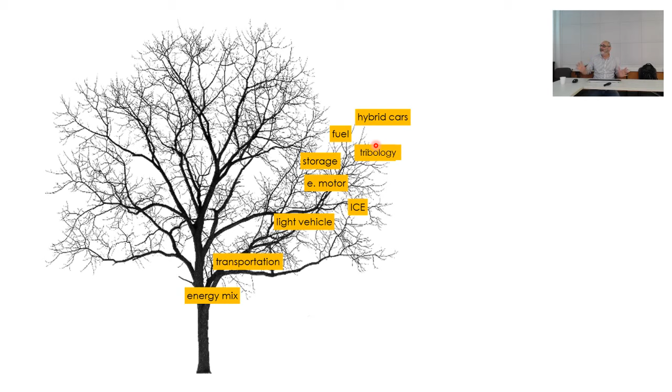I see this subject as a tree of knowledge. So every time you see a tree like this during the presentation, it means that I'm taking one or a few steps back and trying to talk about another subject. So I start my talk by explaining why it seems a mess. I'm going to talk a little bit about all these subjects during the presentation, and I'm giving up doing this in a linear way. So that's the point.

And we can start almost here at the tree trunk by talking about the energy mix. This is the United States energy mix, and I chose that one in particular because it's quite representative of the world's energy mix. Here in Brazil, our mix is quite different actually, so that's why I'm using this one as a representation of the world's mix. This is a Sankey diagram. In this corner you can see the sources: solar, hydro, natural gas, coal, and so on. On the right end, you see the final applications.

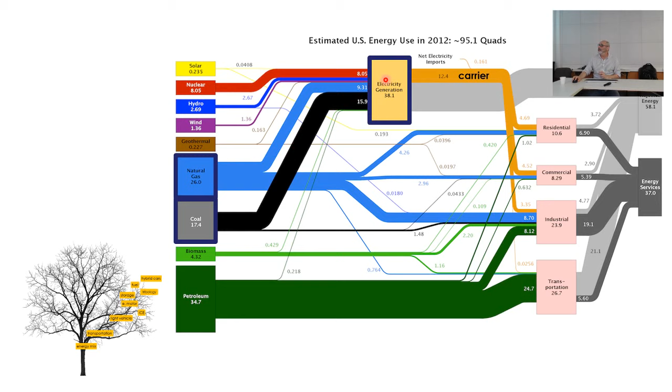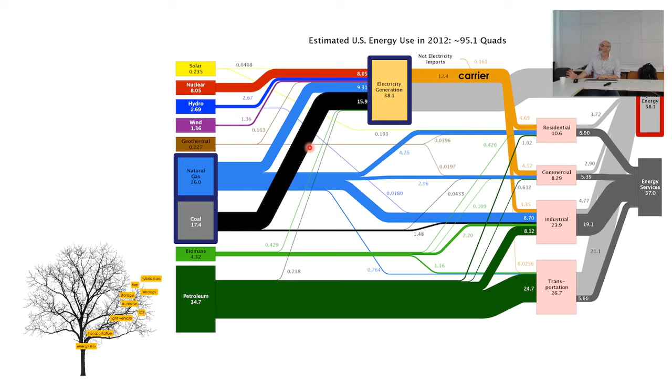And in the middle, you can see what we can call energy carriers. For instance, electricity is an energy carrier, and you see the main sources that contribute to the generation of electricity: mostly natural gas and coal. So if you're talking about electricity, you must understand the geopolitics of coal and natural gas and all the environmental problems. On the other end, you see where electricity is being applied. This is the rejected energy, the amount that is not used. I'm going to talk about that in a few moments.

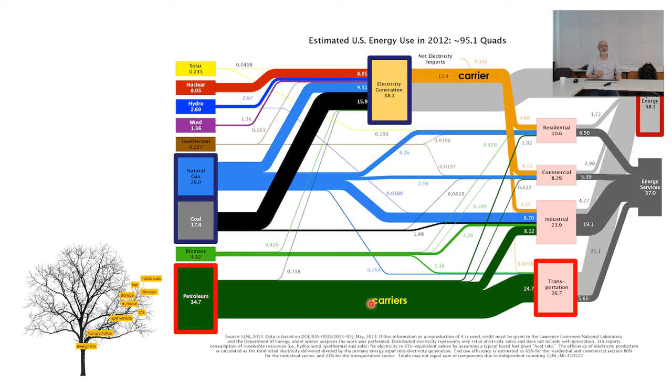But in the transportation sector, the main contributing source of energy is petroleum. In between the primary source and the application, you have carriers: gasoline, ethanol, and so on. If you try to identify the contribution of electricity in the transportation sector, it's a very, very small amount compared to the carriers produced from petroleum. So electricity is not very important for the transportation sector, and it's mainly not for self-propelled vehicles. This is trains and subways, not self-propelled.

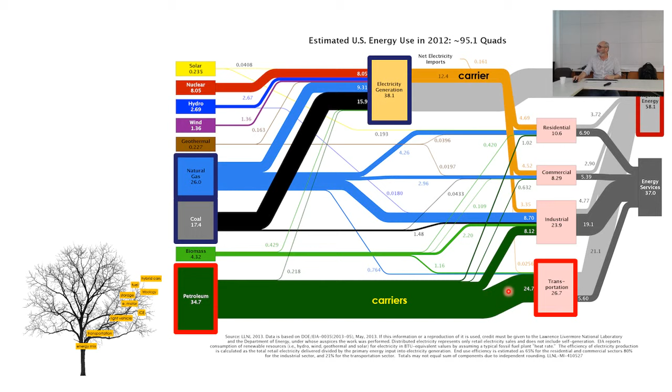So when you talk about transportation, the main source of energy is petroleum. So the geopolitics of petroleum is very important for the sector. If something happens in the Strait of Hormuz, for instance, it's going to affect the whole world. We can open up the carriers: what kinds of carriers and what types of applications you have here.

For instance, you have different types of gaseous fuel, diesel, gasoline, other liquids. Ethanol is in other liquids. And a small amount of electricity. Those are the main carriers. Those are the applications: sea, heavy road transportation, light road, air, and railroads. If we follow one of these carriers, for instance gasoline, you see the amount used in light road transportation is 48 exajoules.

You have to put these numbers in perspective. Remember, the world energy consumption is around 500 exajoules. Exa is 10 to the 18. So when talking about light road transportation, the essential fuel is gasoline and a small amount of diesel, especially in Europe, destined to transport passengers, people. So that's the point.

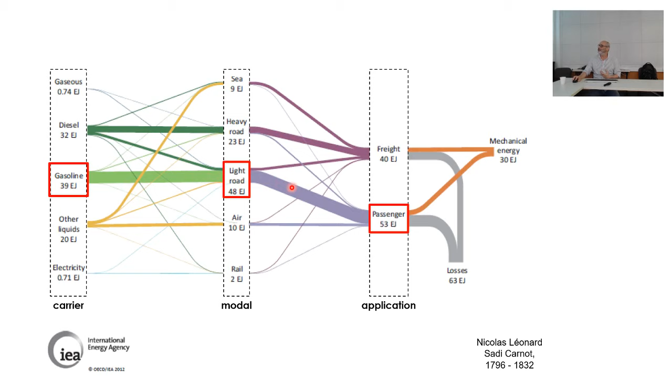And when you think about it, because this is the energy carrier that is being used to transport passengers, you have to extract the amount of energy here and transform that into mechanical energy, especially kinetic energy, because you're transporting these people. So this is exergy, actually. You can see that this mechanical energy corresponds to 30 exajoules out of 93, which is 53 plus 40. The difference is labeled as losses.

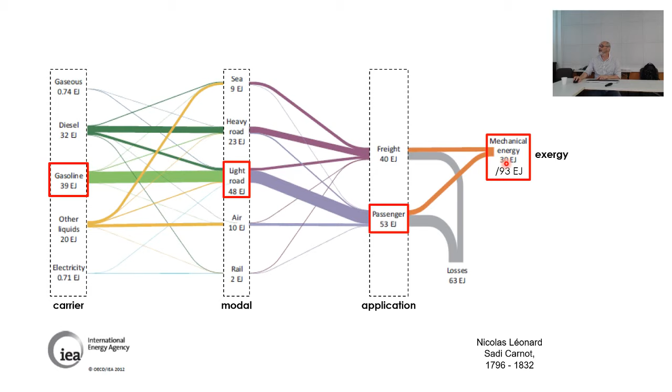I don't agree with this term 100%, but the transformation of all this energy, 93 exajoules into 30 exajoules of exergy or mechanical energy, is done in engines. So you have to understand how engines work. For instance, in gasoline light vehicles for passengers, usually 99% of the engines are spark engines, Otto cycle engines. And you might think those losses are due to poor technology, poor realization of this technology. That's not the case.

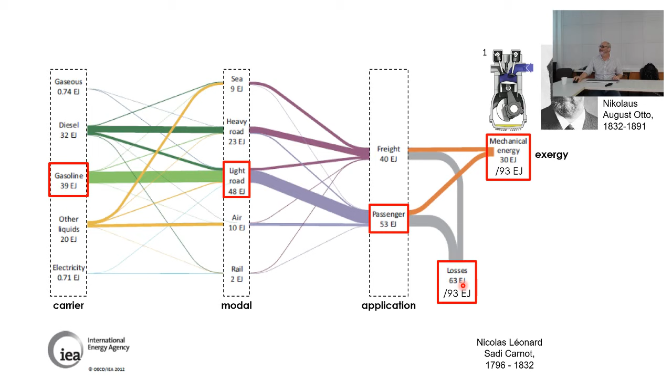I would say 90% of those losses, let's be a little more modest, are actually due to the second law of thermodynamics. They are unavoidable. So you can see how this subject is highly connected, multi-branched. I'm just giving you some examples prior to talking about hybrid cars. So let's move on. Remember, every time you see a tree like this, we were near the trunk here. Now I'm getting a step further.

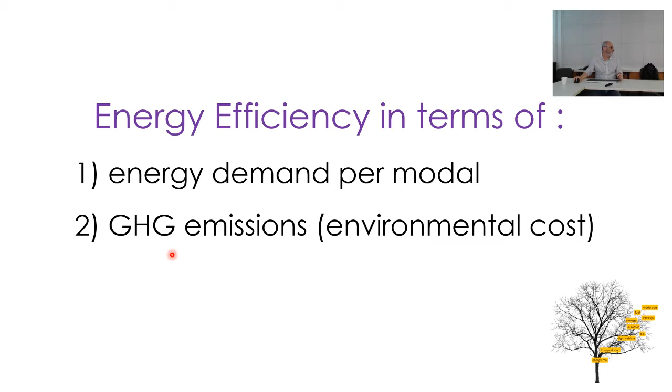Let's talk about energy efficiency in the transportation sector in terms of energy demand per modal. What are the demands for sea transportation? And also in terms of environmental costs, especially greenhouse gases. You see some very interesting numbers here. Focusing on demand per modal, you can understand this in terms of this operation envelope, which is characterized by two variables: the energy cost, how much energy you're spending to transport a certain amount of passengers or freight, and the velocity.

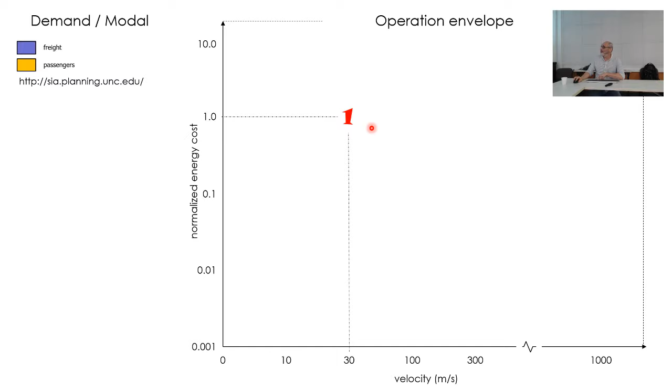And the term normalized, because we're dividing those variables, the energy cost, if I'm not wrong, by the energy demand of an average passenger. So that's the normalization that we are using. In this operation envelope, the ideal world would be to work in this region, because you're accomplishing your transportation task with a very high velocity, so you're going faster, and being in this region of the vertical scale means that you're spending less energy. So this is the ideal region.

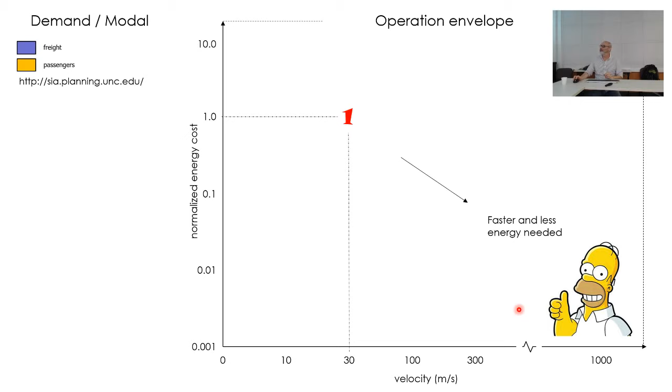When you survey all the transportation technologies and plot the points in this graph, you see, for instance, in terms of passengers, those boxes are actually clouds of points, and each point represents a particular car, a particular bicycle, and airplanes. Sorry for the Portuguese, I didn't have time to translate everything. So when you plot the actual points, you get actual applications in this region concerning passengers.

And when you plot the solutions for freight, those purple clouds of points, you see a tendency to spend less energy. Not a tendency, actually; this is how they become more economically competitive. So for every transportation solution for freight, it's more important to spend less energy than going faster. And remember, we said it would be nice to be able to be here. So why are we not achieving this?

You see there's a void here, except for Homer Simpson over there. So why is that? You see that there's a kind of frontier over there, a Pareto frontier actually, and this reflects the first and second law of thermodynamics, because you cannot go at a very high velocity while spending very small amounts of energy. It's not feasible, because you have to compensate for drag, aerodynamic drag, for instance. So you're going to spend energy for that.

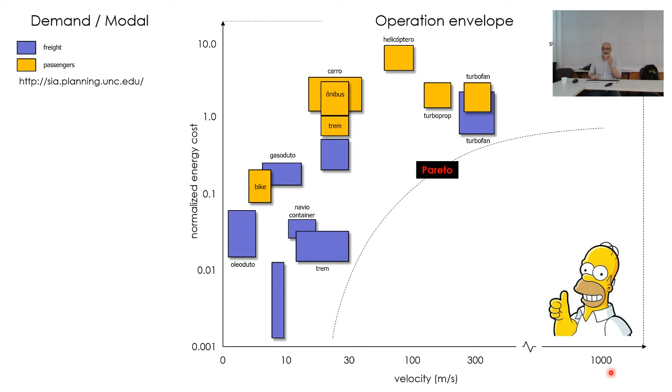And you see that the most important technological solutions near that frontier are very big planes, very big ships, and very big trucks, actually road trains. And this is understandable. Let's talk about a ship. The amount of revenues that you get from a ship like this depends on the volume of the ship. So the larger the volume, the higher the revenues, and the costs depend on the external area of the ship, because it's related to drag.

So when you increase the scale, the volume increases with the scale factor to the third power, and the area with the scale factor to the second power.

So you see that by increasing the scale of your transportation vehicle, you have increasingly more volume compared with the area. So that's why for freight, especially for freight, the solutions are tending to become larger and larger and larger. And this is going to affect roads and several other aspects. So this is regarding the energy demand.

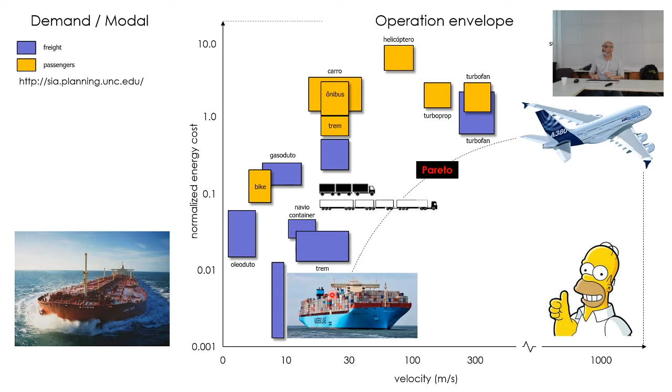Okay, when you talk about emissions, this graph here is very interesting, because you see the most highly emitting transportation modal is airplane. Okay, and its consumption is not that great. Where is aircraft? Okay, so you see it's only 8% in terms of energy demand, but its emissions per passenger per kilometer is several times higher than the second worst one, which are cars. Okay, and hybrid cars are here.

Well, for individual transportation, you see that except for walking and bike, hybrid car is a very, very good solution here. You can see that already, okay? The other ones are collective transportation solutions, okay? And this is related to the speed at which this transportation is accomplished, because the aeronautical engines are actually optimized to be light and not to be highly efficient.

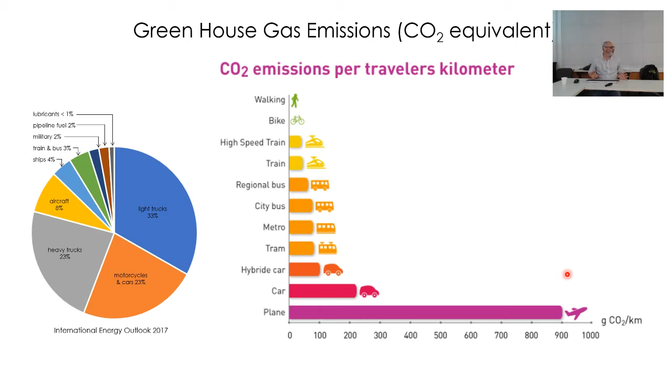So that is why developing fuel or a biofuel for airplanes is a very important technological challenge, because although the consumption is only 8%, the emissions are one order of magnitude higher. So you see, I'm talking about many things at the same time, so I hope you don't get lost. That's why we always see the tree. So every time I'm moving from branch to branch in this tree, you're going to see this image.

Okay, so let's move on and let's talk about the energy conversion chain in the transportation sector. Okay, because I talked about the primary sources. You see that it's mainly petroleum, 99% is petroleum. Ethanol is labeled as other liquids, and this is quite disturbing actually for us that we are trying to develop that. And well, this is not true in Brazil. Ethanol is a very important fuel here in Brazil, but not in the world. In the world, this is incipient, I would say.

Well, so let's try to make this analysis, what I call the energy conversion chain, also labeled the well-to-wheel analysis. Okay, so that's why you see the tree here. So let's start at the well. You have a primary source, which we know is petroleum. You have to transform it, because petroleum is the primary source. You cannot use petroleum as petroleum in an engine, for instance. So you have to transform that into some kind of energy carrier: gasoline, ethanol, or kerosene, for instance.

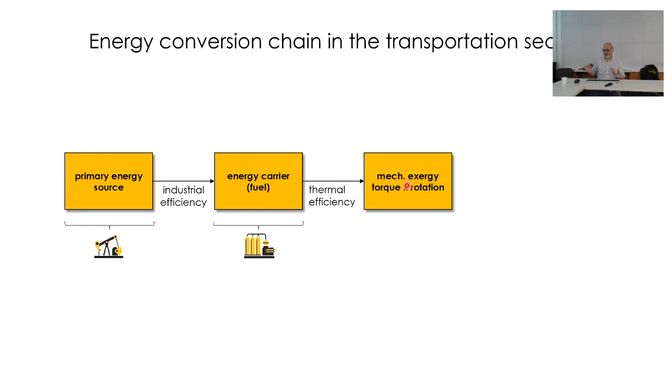And since we are talking about fuels, electricity is not the case. I'm going to talk about electricity in a moment. But you have to have thermal efficiency, and you have the second law of thermodynamics intervening in this segment. So you can have mechanical power at the level of the wheel or the propeller, for instance, of your ship, and you also have to have propulsive efficiency, because this has to be transformed into kinetic energy, which is pure exergy.

So this is force times speed. In this airplane engine, for instance, you accelerate the gases in this direction, and the reaction to this becomes a force. But this force is not yet speed. There are conditions under which this conversion, or generation of speed from this force, can be achieved with a high efficiency.

For instance, I don't know if you know, but in order to have maximum propulsive efficiency, the speed of those exhaust gases here must be exactly the same as the speed of the aircraft. So that's the most efficient situation. So that's the conversion chain: primary source, fuel, mechanical exergy, and kinetic energy.

We can also segment this into self-propelled vehicles, which means that they carry their own energy source, which is different from a sailboat, for instance. Its energy source is wind, and it captures the wind that is in nature, so it doesn't have to transport its own energy source. So we have to talk about energy storage technologies, and also about what we could call powertrains, the means to convert this force into speed.

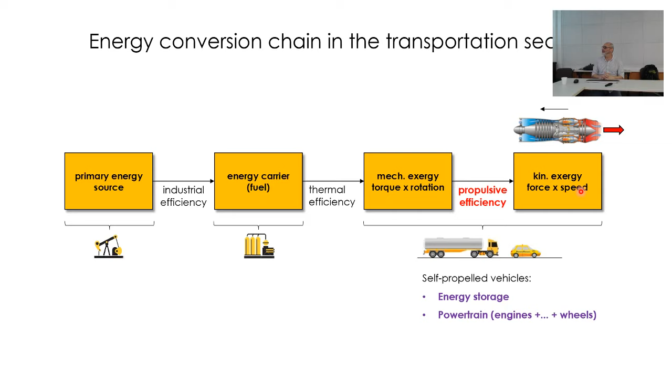Tires, for instance, are a very important subject in this matter, and it goes under the label tribology in that knowledge tree that I showed at the beginning of my talk. So we're going to talk about self-propelled vehicles in general, and let's start by talking about energy storage solutions for these kinds of applications. Remember, I'm not talking about non-self-propelled vehicles like a sailboat or a train like this.

I consider this a very interesting subject, but you can start by asking yourself, how do batteries compare with liquid fuels in terms of energy storage? Remember, a battery stores electricity. A liquid fuel you have to burn, you're going to produce heat, and this heat you have to convert into mechanical energy. So the second law of thermodynamics applies in this conversion. So in order to compare fuel with batteries, you have to compare in terms of exergy, not in terms of energy. So this is fair when comparing both.

If you compare the internal energy of a certain fuel, it's going to be 4 times higher, because the electricity that is stored in the battery was, for instance, produced by burning coal, and when you burn coal, you were subjected to the second law of thermodynamics. So comparing batteries with fuel in terms of what? In terms of two things.

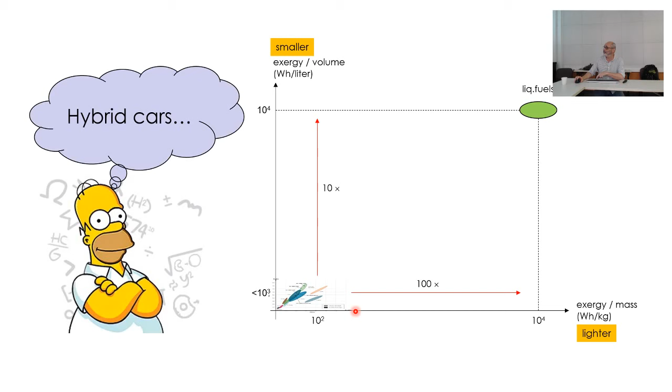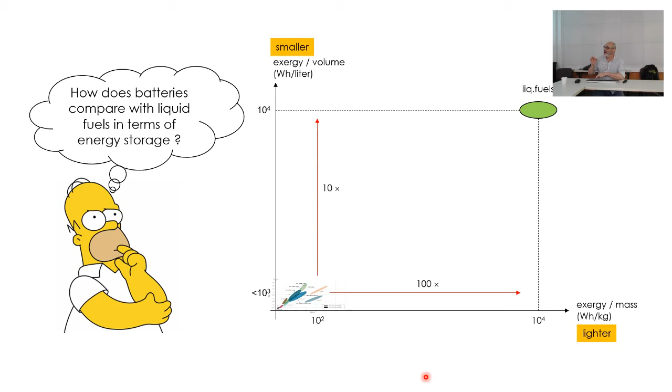Okay? So, yeah, just a few numbers, very interesting, because those are qualitative numbers, except for the previous slides in which I showed you the actual numbers of batteries. Remember the numbers, 120, 200 watt-hours per kilogram. Remember these scales. Now I'm going to show you actual fuels. You have megajoules here. The conversion factor is 3.6. Okay, so several orders of magnitude better.

And you see, for instance, those rockets. This type of rocket uses two types of fuel: liquid hydrogen for the main tank here, and solid fuel in these boosters on the side, which are in here, aluminum, things like this. You see kerosene, gasoline, diesel, and we ourselves, we're not that bad. You see the fat metabolism. So fat is a very good solution for energy storage, because we are a self-propelled transportation device. We transport ourselves, and we have to have this energy storage solution.

So fat is very interesting, but this is another point. Fat is a good storage system because it stores a huge amount of energy in a few kilograms, and it occupies a small volume, but the rate of release of this energy is low. I mean the power, because this is energy, not power. So that means that we are very efficient in terms of energy, but we are not very powerful. Birds have to be powerful, especially hummingbirds, they have to release energy at a very high rate. So their metabolism evolved to take that into account.

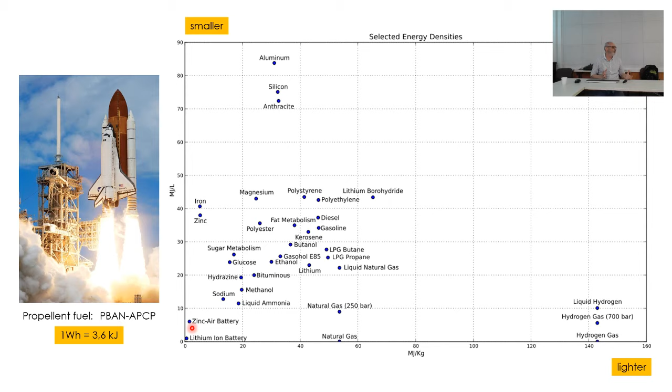Okay, so this is a very interesting graph, and you see batteries, zinc batteries, lithium batteries are near the origin. So that's why I say that pure electric cars are actually a niche solution. It's a very interesting solution for very specific problems, not for the general transportation problem which we have in our world today. Okay, so let's move on.

You see the tree. I'm going to just change subject. I hope at the end of my talk you will be able to form a broad picture of the subject, but you have to assemble these ideas and discussions by yourselves. I hope to make this easy for you. Well, so let's talk about these traction systems, because they are the last link in the conversion chain which I showed you a few slides ago. We have to understand how the mechanical energy at the level of the shaft is transformed into kinetic energy for your transportation application.

And we're going to focus obviously on hybrid vehicles. So let's see a type of hybrid vehicle. I like this one. It's a BMW concept car, and by concept, it means that it was not developed to earn money, but to test ideas. So it has a lot of interesting ideas. Let me zoom, because I think it's going to be easier. You recognize a hybrid car because, first of all, it has two types of engines: an internal combustion engine here and an electric motor. These numbers are particular to this model, but they are representative.

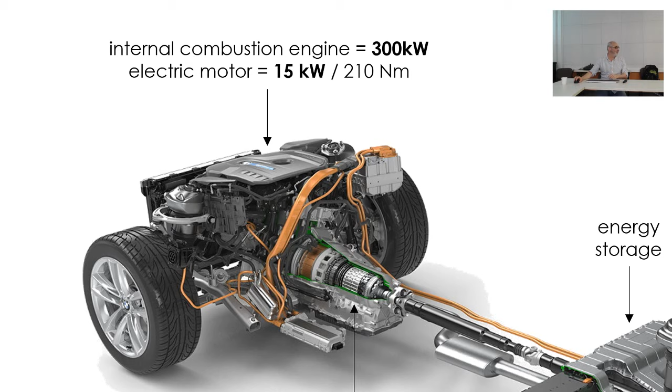Keep in mind the nominal power of the combustion engine is 300 kilowatts, and the power of the electric motor only 15 kilowatts. Keep these numbers in mind because I'm going to explain. So first, you have two types of motors. Second, you have a mechanical device which can be called a power split. In addition to a gearbox, you have a power split, which are planetary gears, I'm going to show a picture. So I'm going to explain what this kind of mechanical device does.

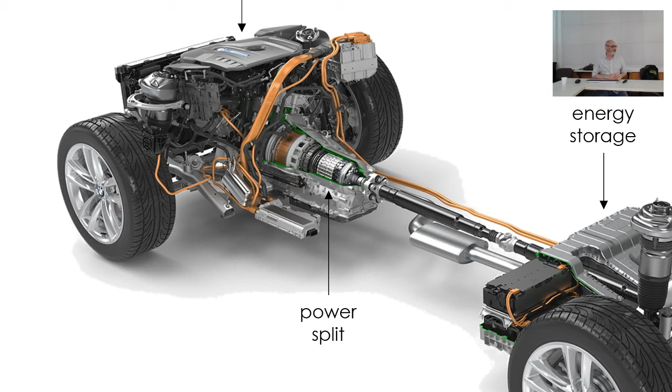I imagine that you guys are from very different areas, not only mechanical engineers. So please stop me if I'm using undecipherable language in terms of mechanics. But you can see the power split. Another interesting thing that tells that a car is hybrid: you have two types of energy storage. So you have a liquid fuel tank.

It could be gas, but it's not efficient. Okay. So you have a liquid fuel and usually a small battery. This battery is more like a buffer battery. Well, I'm going to show you the topologies in a few moments, so you're going to understand.

They use lithium, sodium, sulfur. It can be the best that they can do, actually, because the point is it's small compared with the pure electric car, because in the pure electric car 100% of the energy must be stored in the battery. So roughly 1/3 or even 50% of the weight of the car is batteries. Okay, so this is very bad for efficiency.

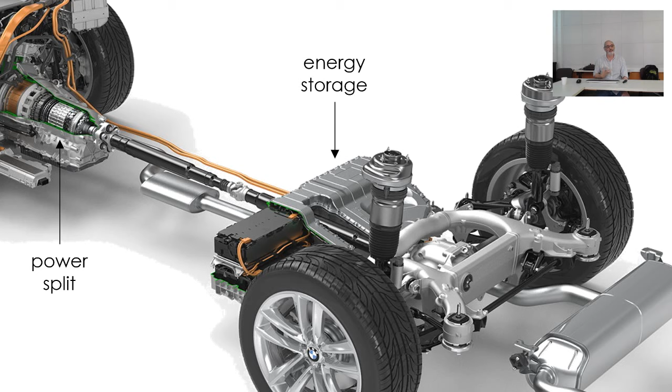Think about the envelope that I showed you a few slides ago. Okay, but hybrid cars have just a small battery, and I'm going to explain why it doesn't need to be a big, large, heavy battery. Okay, so this is a typical hybrid car, and you also have, well, traction wheels.

This is very important. Let me just point out that electric motors are so good in terms of traction system because they can be miniaturized and they can be put inside the wheel. You can have 4 different independent motors, which can be controlled by a computer, and you can put that into each wheel. So it's a very, very good solution in terms of a traction system. No, not an attraction.

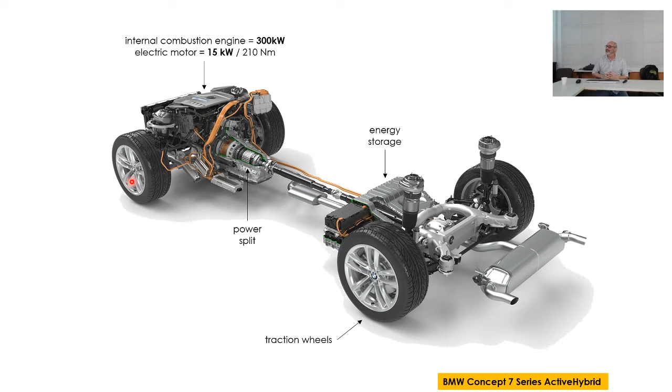A traction system, okay? But the problem is it uses pure exergy, which actually is electricity. So the problem is how to produce this electricity. So let's move on. And again, we must choose a direction in this knowledge tree here. Let's talk about these different drive configurations. Because hybrid cars are a kind of mixture of a pure internal combustion engine car and a pure electric car, but this melange can be made in very different ways. Okay, so let's talk about these configurations.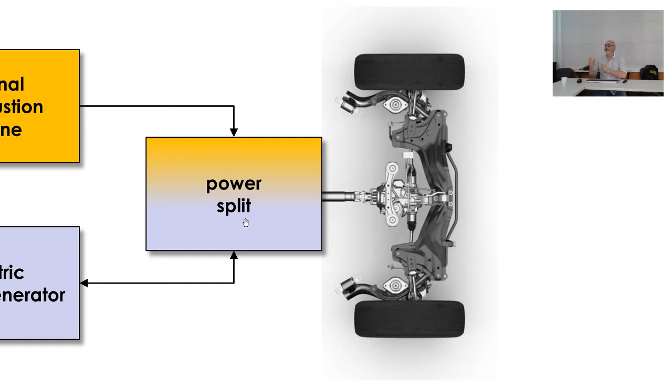So those devices are gears actually, and they are very interesting because, for instance, if the wheels are demanding power, this power split can take 70% from the internal combustion engine and 30% from the electric motor. Another thing it can do is when braking, the power split can cancel this connection here, and send mechanical power to the electric generator.

Okay, so it can store the braking energy. And this is very important in urban applications, for instance, because it can amount to 10 or 15%, depending on the traffic conditions. So 15% is a very good saving.

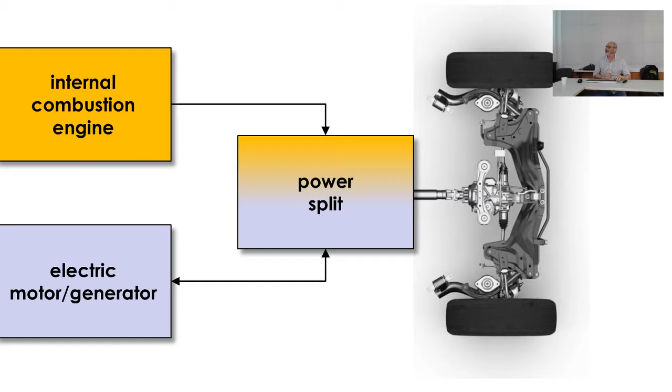Okay, so the parallel configuration. It has two motors. Remember, the BMW motor that I showed is a parallel configuration. You recognize it because you see the power split. So it has an internal combustion engine. Remember the numbers: the power for the BMW motor was 300 kilowatts, and the electric motor was only 15 kilowatts. It's one order of magnitude smaller, 20 times smaller.

The electric motor/generator is connected to a small battery. It's still a small battery because the main source is still going to be fuel. The advantage is that you can charge the battery externally, as you need to do with the fuel reservoir. And another thing to point out is that this configuration is also capable of storing the braking energy.

So when braking, the power split sends the mechanical energy. The motor becomes a generator. It's just a matter of switching the connections inside. And it's going to generate electricity, and this electricity is going to be stored in the battery.

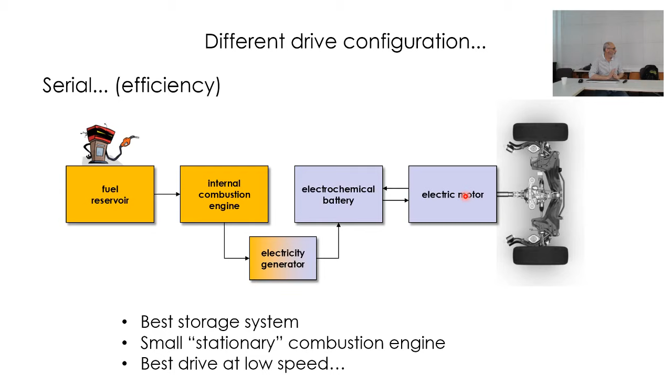So in the serial parallel configuration, when you put the numbers 300 kilowatts, 15 kilowatts, is this level of power, 300 kilowatts, the maximum power? For that particular car. But as in the regime of maximum power delivered by the engine, not at all moments. In the city, I think it would be 10 times less.

Yeah, sure. But what I want to try to explain is why the electric motor, this motor here, is in no case going to be 10 or 20 times less powerful than the other one. The maximum. The limits. And I'm going to show that, and actually we're going to make calculations and simulations; in my last slides I'm going to be dealing with this subject. Okay. Thank you.

So let me conclude this slide by pointing out that this configuration combines the best qualities of both drive systems. And I'm already anticipating some things that I'm going to show you in detail. The electric motor, in addition to being efficient, is a very good traction system at low speeds, especially when you're starting to move. I'm going to show you that.

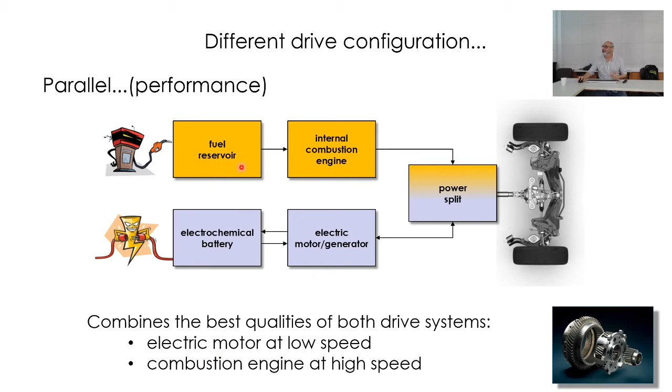I'm going to show you that electric cars are very good for cities, for urban applications, okay? But on roads it's also good, but the internal combustion engine is actually better, especially if you have to have liquid fuel anyway. So let's move on. Let's try to be a little more specific.

And when I say that the electric motor is very good for low speed applications, let me show you why, try to explain. And to understand this, you have to look at the torque curves.

Sorry for the Portuguese. I keep finding things in Portuguese, so sorry for that. You please ask me if you don't understand one of those terms in Portuguese.

So that's the torque curve of the electric motor, and that's the typical torque curve of an internal combustion engine. The first thing that you see is that in electric motors you have actually almost the maximum torque at zero rotation. Okay, why is that? Because in order to have a torque or a force, actually, you only need to have electricity flowing in the coils of the motor.

Okay, the car can be stopped, and if you have electricity, you're going to have a force. This is very, very good, because when you're starting the movement, you need exactly this. You need a very high torque in order to start the movement, in order to start it efficiently or quickly, if you're looking for performance. Another characteristic is that its torque curve tends to decrease with the increase of the rotation of the shaft. This is another typical characteristic of an electric motor.

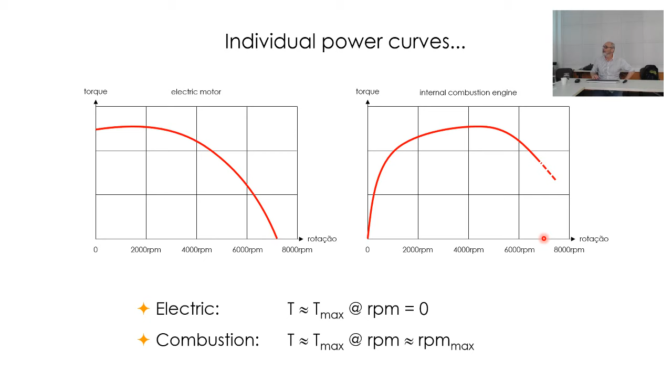This curve here with this flat top is typical of cars, because they have to work under different rotations, 2,000 RPM to 7,000 RPM. This is a typical application. So let's move on.

So if you are at low speed, 2,000 RPM, for instance, it's going to use 100% of the electric motor, which is written in red here. And above, let's say, 5,000 RPM, 100% of the power is going to come from the internal combustion engine. In between 2,000 and 5,000, you have a linear combination of both. And this is done by the power split, which is actually a planetary gear system.

So the combined torque curve is the dream torque curve, actually, because you have maximum torque at zero rotation. This is very good for starting the movement, and you have a flat top until, well, actually, at these rotations, 100% of the power is coming from the internal combustion engine.

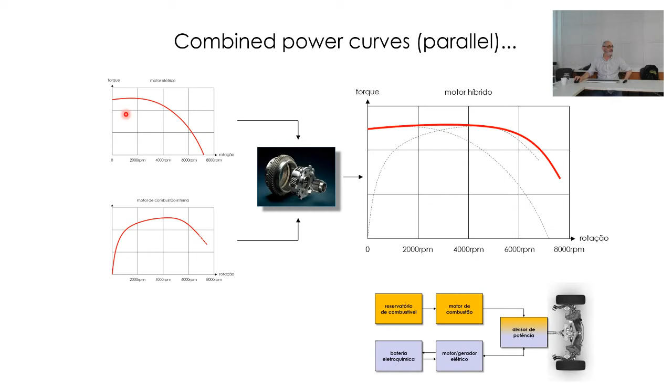You see, you have this flat top here from the internal combustion engine. This is very good. It means you have a high torque at high rotation speeds. This is fantastic for traveling on a road, for instance. And you also have high torques at low rotation speeds, actually at zero rotation speed. So this is a dream torque curve.

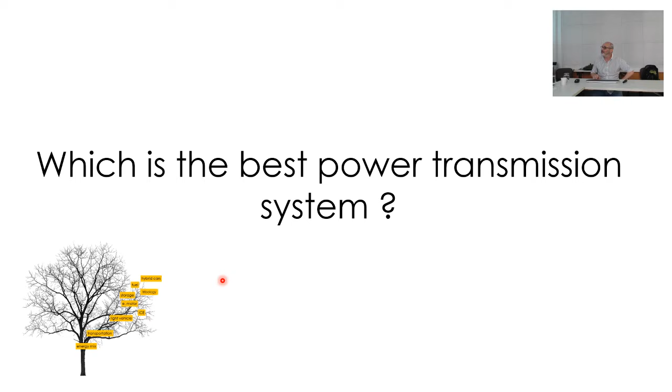And since we're talking about several different configurations, which is the best power transmission system? In order to answer this question, we have to take a few steps back here in this knowledge tree and do some comparisons. When we talk about best, it depends in terms of what. So let's talk first about energy/emissions efficiency, and let's compare that with the pure electric car.

So this is a typical electric car. It's very simple, even simpler than I'm showing you, because it doesn't need to have a gearbox, for instance. I'm going to show you that in a few moments. It's going to be a good technological solution if the electricity that you have to supply externally is produced from renewable sources, or at least from sources that are not emitting greenhouse gases, for instance hydropower, which is what we have here in Brazil.

But let me point out that even if you're burning coal to produce electricity, this is a good solution for urban applications, especially in very large cities like Paris, San Francisco or Santiago, cities in which you have pollution problems. They are usually near mountains that hinder the dispersion of these pollutants. So even if you're burning coal, at least the CO2 that is being emitted is far away from downtown.

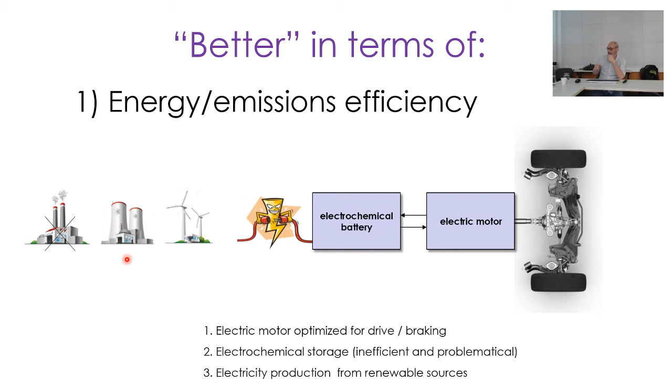I'm pointing this out because, I don't know if you remember my first slide, I showed you the mix, and electricity from nuclear power plants is very important in the world. Not in Brazil, but in the world, yes. So this is a good solution for urban areas, especially very big cities which have dispersion problems. But batteries are still a problem.

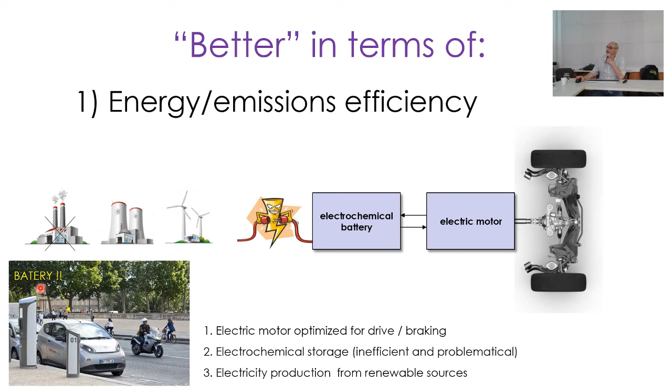If you compare that with the serial configuration, the serial configuration is actually an electric car with its own power plant. You transport your own power plant, and this means that you're combining the best energy storage solution, liquid fuels. You have the stationary combustion engine and the generator here. So the series combines all good solutions, and you have the same problem.

If you use biofuel or some fuel from a renewable source, not from petroleum, this is a very good solution also in terms of emissions. It's a good solution in terms of performance at low speeds, I already talked about this, and in terms of emissions, it will depend on the primary source of your fuel.

In this case, you can optimize the combustion engine to work at a better torque point, and only produce the energy. You don't have to follow that curve.

This is typical. Even small generators that we can buy at the supermarket have these characteristics. They work near a very specific rotation, and they are optimized to be highly efficient at that rotation. If for some reason you have to work far away from that rotation point, it's going to be very inefficient. But that's a good thing to have.

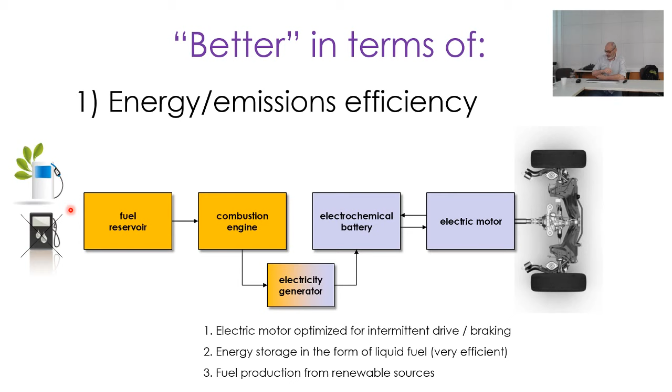And the other one, the parallel configuration, well, it's the same actually. In addition, because of the power split, it's a relatively small component. So it transforms the parallel configuration, because if you look here, it's almost like a pure electric car with its own power source.

So the parallel configuration can, in some situations, work as a serial configuration. In this situation here, for instance, you have power coming from the internal combustion engine and being sent to charge the battery and to the wheels. In this situation, it's working almost like a serial configuration in terms of performance.

Okay. In terms of emission, well, the same applies. It will depend on the source, the primary source. So if you have some renewable fuel here, or a fuel produced from some renewable source, that's okay. And the same applies to electricity.

Okay. And I'm going to show you a simulation actually, the possibility of optimizing not the configuration, but the control here, to adapt it to different situations. Okay. Oh, in this case, it's a hybrid system with a parallel configuration. Yeah. And that is plug-in in this case. Yeah, because you can charge the battery. It can be plug-in or not.

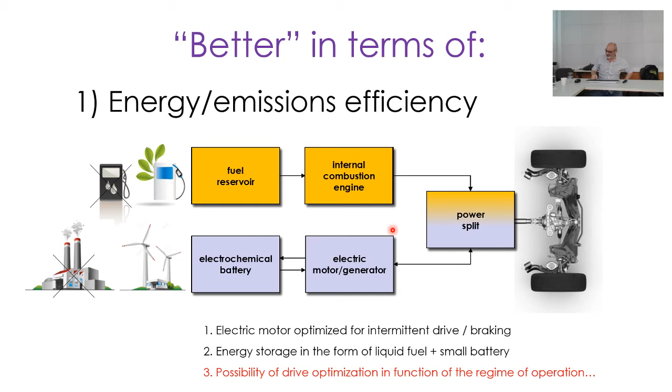Yeah. Again, let's take another direction in this knowledge tree. I was talking about efficiencies in terms of energy and emissions. Let's talk about performance. Okay, because when we want to go from point A to B, we have conditions to be satisfied. Okay, we don't want to go from point A to B in a year. Okay, we have expectations. So performance is a very important issue.

And when we talk about performance, well, there are several operating conditions. For instance, highway conditions. It's an application very different from urban conditions. Okay, in a city you stop and you start and you stop and you have traffic jams and so on. This is very different from a highway, for instance, where you're going to spend even hours at the same regime, or not a very different regime.

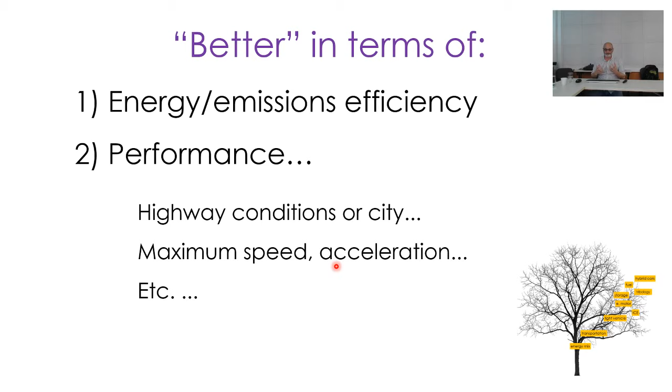And also, depending, you can be talking about competition. So you would like to have a maximum speed or maximum acceleration and so on and so forth. Okay, you need to have how to compare these technologies. So let's try to make a competition, a virtual competition based on actual data.

Okay, so our competition, what's the idea? We're going to have three competitors. One with a hybrid car, another one with a pure electric car. Well, remember, this is electric or a serial configuration, because a serial configuration is an electric car with its own power plant. And we're going to have a traditional combustion engine car. And we're going to look at two things: the acceleration time from 0 to 200 kilometers per hour, and its maximum speed. That's a virtual competition.

We're going to write down the equations and simulate that, and we're going to arrive at some interesting conclusions. You can go to a bookstore and see many types of comparisons like this, but when you do these comparisons, you have to compare equivalent motors. And in which conditions is a hybrid configuration equivalent to an electric configuration and to a typical combustion engine? The key word here is equivalence.

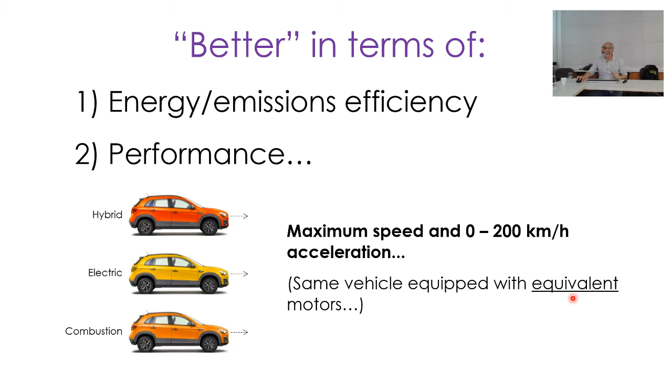Okay, how do you have this? That's what I want to explain, because the equations I'm going to show you are very, very simple. So the most important idea here is how do you have this? Let's start writing down some equations. The relation between the speed and the rotation of the wheel will depend on the radius here and also on the transmission relation and on the rotation of the engine. Sorry if this is too trivial for you, but we have people from several areas, so I took the liberty of reminding you some equations.

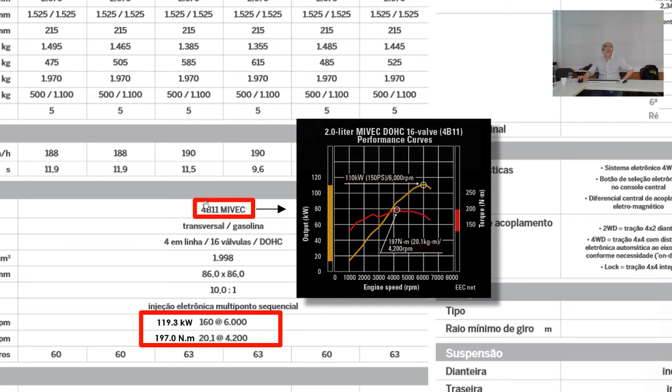Those are very simple equations, but the point here is omega is the rotation of the engine or the motor, and omega wheel is the rotation of the wheel. They don't have to be the same. Okay, and I took an actual engine. At the time I had a Mitsubishi ASX, and that's the data sheet of the car. I don't know if you can see here, but that's the model. I have the torque and power curve here.

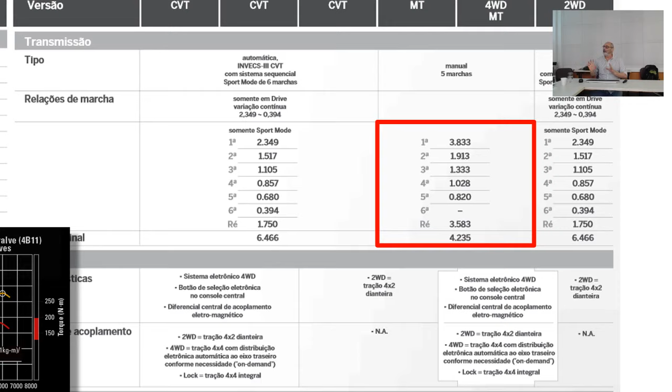Some important parameters here: the maximum power and the speed at which it occurs, the maximum torque also, 197 Newton meter. So I'm going to virtually build three cars equivalent to those characteristics. Other important parameters are the transmission relations for each gear. So they are all going to have the same characteristics. And I wanted to point out that this is an actual car. It's still in the market. Okay, so let's see. That's our internal combustion engine car.

It's already done, because we have that in the market. So let's try to build a virtual electric and a virtual hybrid car from this, being equivalent to this car here. So let's see how it works in terms of why do we have to have gears?

You see, I pointed out already that the rotation of the engine is not necessarily the same as the rotation of the wheel. And why is that so? Because you see, that's the torque curve of the engine, and that's the rotation speed of the shaft. And when you apply the transmission relations, which come from the gearbox, and also there are some differentials that you have a fixed transmission relation here.

But anyway, when you apply this parameter A, you see that if you are in the first gear here, at 7,000 RPM, your speed is going to be only 50 kilometers per hour. So that's why you need gears. If you want to go further than 50 kilometers per hour, you have to engage the second gear, third, fourth, and fifth gear. Sorry if this is too trivial for you, I'm very sorry for that.

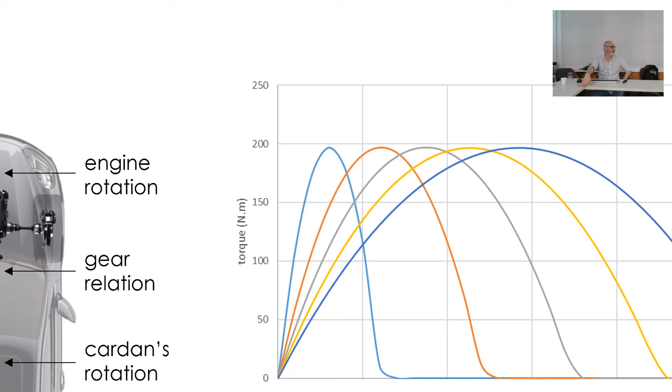So when we have to engage another gear, for instance, at first gear you start movement, then you feel that it's slowing down, but you see at second gear you have a higher torque. So at this moment you can manually change gear, or if it's an automatic gear, it's going to change automatically. So that is how we change gears, and that's the resulting torque when you accelerate from 0 to the maximum.

What's going to limit the maximum speed that you can achieve here is friction forces and aerodynamic drag and so on. I'm not taking that into account here. That's a simple geometrical conversion. So that's it for the internal combustion: that's the available torque at the wheel when you have the gearbox and gear system. We have to have equivalent solutions for the other two competitors, the electric and the hybrid.

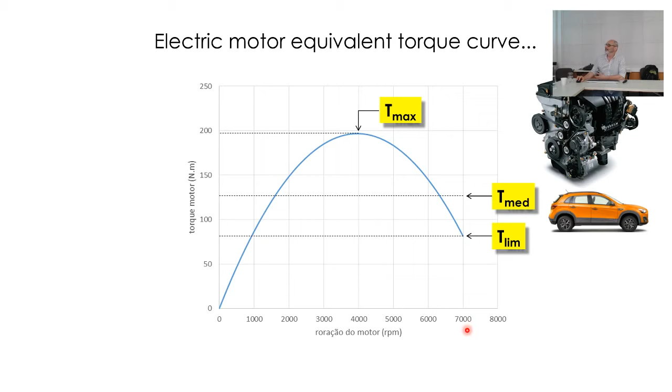So what are the conditions to be equivalent? If you get a general torque curve, you have some important points. The maximum torque, let's say 200 Newton meters. The average torque, which is proportional to the area under this curve, and the limit torque at the limit speed. So we're going to look for an electric motor with the same maximum torque, the same average torque, and the same limit torque. That's how the electric motor can be said to be equivalent to the internal combustion engine, and that would result in the same average power.

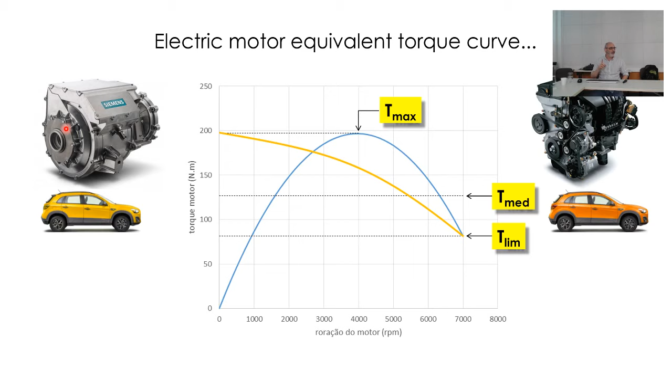I'm going to calibrate my parameters in order to satisfy this. I'm going to show you. And coincidentally, there is an electric motor in the market with very similar, not exactly, but very similar characteristics. And of course, the hybrid one is going to be the combination of both, with some laws here. Let me point out that these modulation laws can be changed depending on external conditions. This is not fixed. So that's how we can have three equivalent cars.

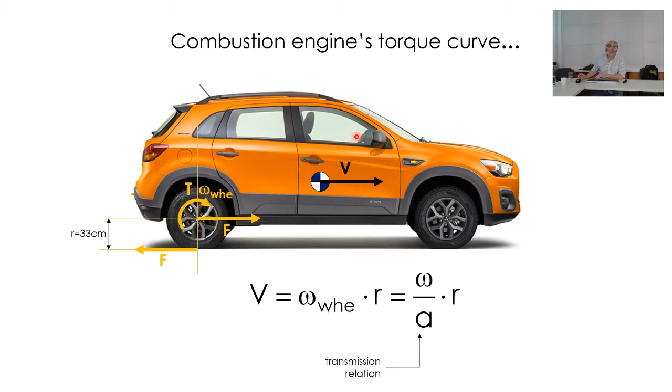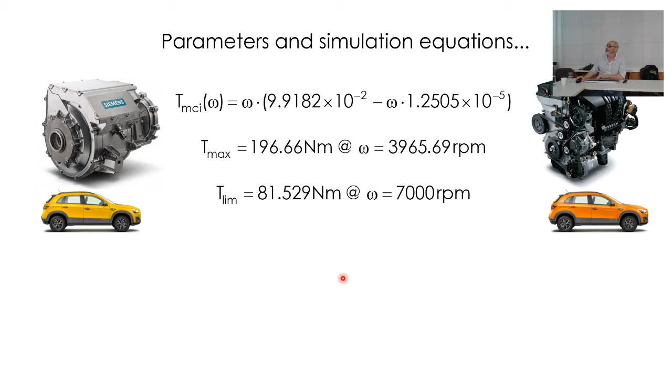And just to show you the numbers, this is the torque curve of the internal combustion engine. I just fit this polynomial here to, let me go back a few slides, this torque curve. That's the actual torque curve of this actual car. So that's the mathematical regression, and the maximum torque and the corresponding maximum speed are given in the data sheet. The limit one at 7,000 RPM. Those are the numbers.

Look, this is very interesting because you don't need to have a gearbox, okay? You don't need it, because if you change gears, it's only going to get worse. So this is a very interesting advantage of the electric cars, because gearboxes are heavy, they are expensive, you have to maintain them. But the price that you're going to pay is that your torque curve is going to fall down at high rotation speeds. Okay, that's a problem.

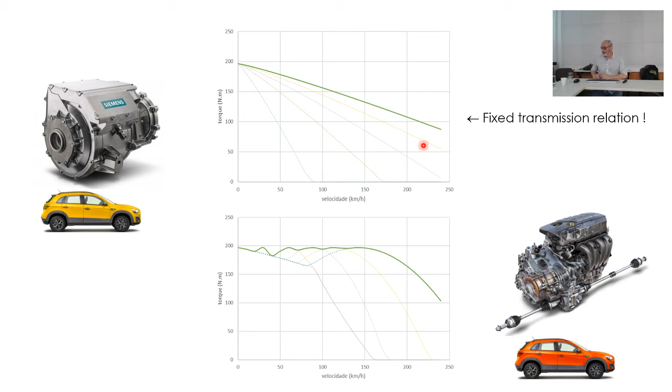Okay, so those are the equivalent motors, and those are our competitors: the internal combustion engine, the electric car, and the hybrid car here on the right. And you see that the electric motor, if you pay attention to the resulting curve, is used only at low speed, and that is why the power here is 20 times smaller than the power here. Because you need the electric motor only at the start to accelerate, and then the internal combustion engine kicks in and provides the majority of the power. So this explains why you don't need to have a very powerful electric motor.

So let's complete the model to obtain the governing equations. I already showed you the relation between torque and rotation. The governing equation is a very simple one. It says that the acceleration force, which comes from the torque available at the wheel, is going to be used to accelerate the car, M is the mass of the car, and to compensate for the aerodynamic drag. Very, very simple equation. I'm not considering other influences.

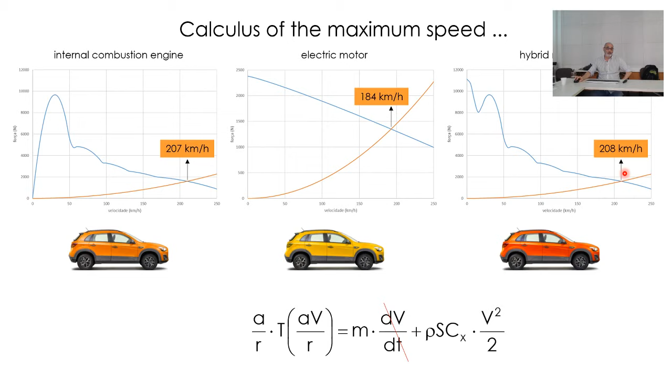To calculate the maximum speed, at permanent regime, this term goes to zero because things are not varying anymore. So the supplied torque at the wheel is going to equal the drag force. You can see that graphically: this blue curve is this one, and the orange curve is the aerodynamic drag. For the internal combustion engine, you achieve 207 kilometers per hour, the electric car 184, and the hybrid one 208. So that's one of the results that we were looking for.

The idea is to replace the derivative, which is the acceleration: dv/dt is replaced by delta v over delta t. This actually becomes a means of calculating the next velocity from the previous ones. You start with v0, then you calculate v1, then v1 enables you to calculate v2 and so on. You can even use a spreadsheet on your cell phone to simulate these equations. So what are the results? Let me control it. What are the results?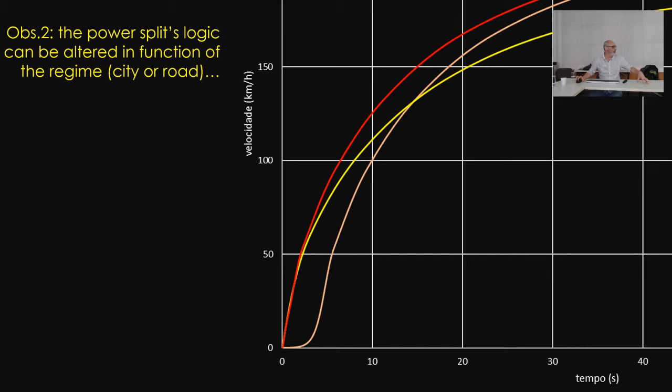That's very typical. Okay, the electric starts very fast and is followed by the hybrid one, because the parallel hybrid car behaves as an electric car at low speeds, but the electric car starts to lose performance because the torque curve starts to fall down. The hybrid one doesn't lose performance because the internal combustion engine starts to kick in and supply the necessary power.

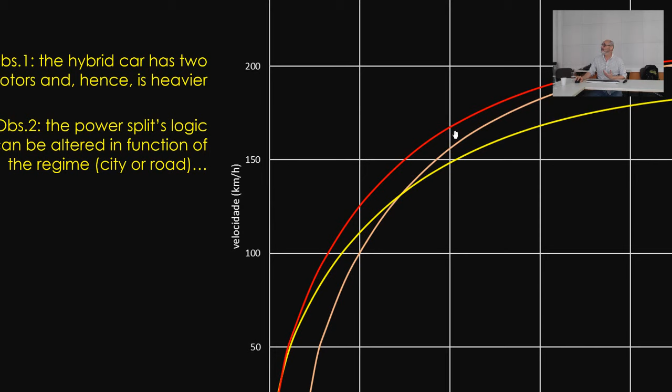And when you look at the internal combustion engine, it's becoming a high performance car at higher speeds, so it's going to pass in terms of velocity at some point. So at the end, the hybrid car achieves 200 kilometers per hour after 30 seconds of acceleration. The internal combustion engine, let's say 44 or 45 seconds, and the electric one does not achieve 200, because of the torque curve.

Okay. In terms of positions, because this is speed: after 60 seconds, the internal combustion engine is almost 300 meters behind the hybrid car. The electric car is almost 300 meters behind the hybrid car here. Okay. And let me point out some things here before moving to what I think is my last slides.

The hybrid car performs better, but it has two motors. They are equivalent to one single motor, but it has two, and it can combine the better qualities of both motors depending on the regime. So that's an expected result. Another thing I would like to point out is that the controlling logic of the power split can be altered. A competition like this is not a typical situation, just to test the concept, but it can be adapted to work in a city with regions at very low speed but also high speed avenues, so it can be modulated.

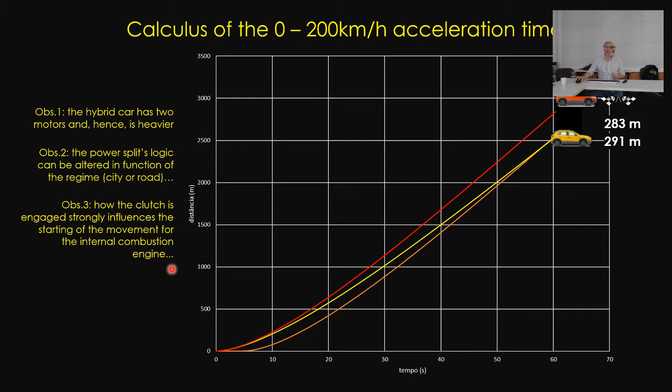And another thing I wanted to point out is this slide here, showing how the way the clutch is engaged strongly influences the result for the internal combustion engine car. If you take longer to engage, you're going to take longer to accelerate, and you can arrive almost at the same distance as the electric car. And this is a problem for manual systems. The automatic one is supposed to be better, supposed to be optimized. Okay, so that's the car.

Let me conclude this last topic by emphasizing that the electric drive is better at lower speed, although batteries are very problematic as energy storage systems. I really hope that you keep this in mind. Number two, internal combustion engines perform poorly at low speeds, but liquid fuels are a very good energy storage system. There is no better solution, especially in terms of the scale of the demand of the transportation area. And third, hybrid drive synergically combines both drives with the best storage system. That's why I'm a huge fan of hybrid cars, although they are still more expensive than the traditional ones.

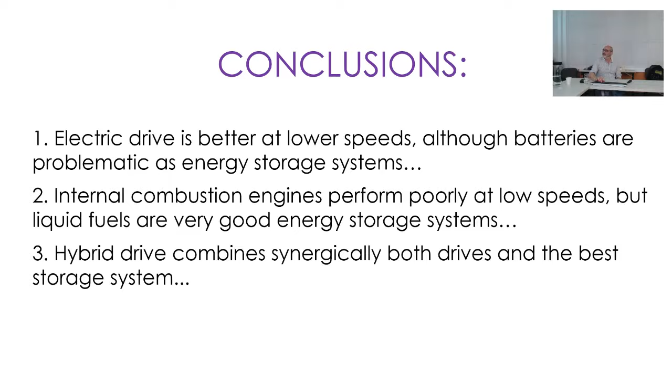But some of those questions you can answer by very simple simulations which I showed you here. Because you can change, for instance, I didn't do that, but by changing the logic, and by logic I mean these laws here, modulation laws. You can change that, and you see how this affects the performance. And you can also devise other types of tests, not just an acceleration test as I showed you. You can simulate different types, but they are very simple simulations.

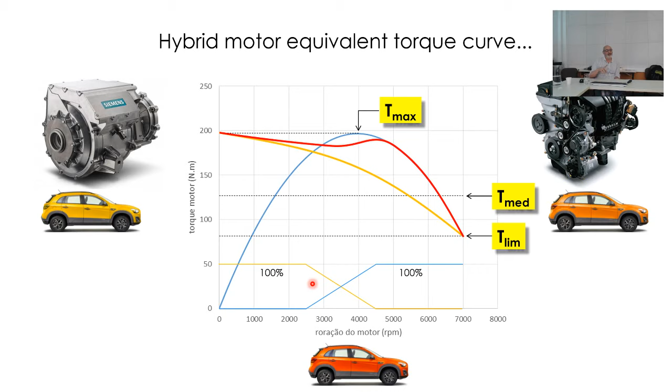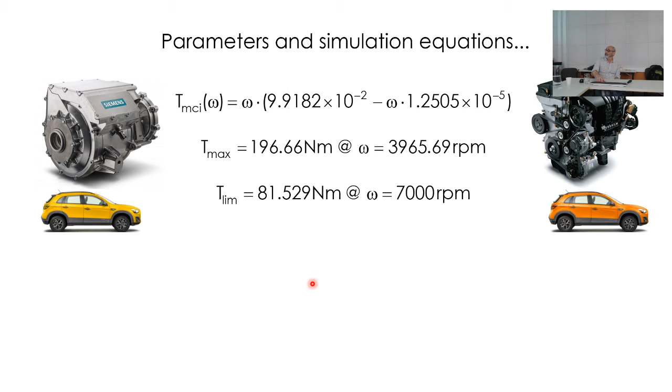My point is that they don't have to be very complex, because this governing equation, let me see, this governing equation is very, very simplistic actually. You don't have elevations, downhill and uphill. You don't have this. But they are sufficient to show you a lot of things. So my point is that even though your governing equation is a very simple one, it can already show you a lot of stuff.

When you talk with people, you see that most of the time they are speculating. That's why I took an actual car with actual data. And I try to point out that when you do comparisons, you have to be, let's say, fair in terms of comparing equivalent things. And that's it.

As a hybrid car enthusiast, do you know how much a 15 kilowatt electric motor would cost? Very, very cheap actually. A 15 kilowatt motor, for an industrial motor, you can carry. So it's not that heavy, not that expensive. By coincidence, I happened to have bought a motor like this a while ago, something like 2,000 reais, or even less. It will depend if it has a gear system or not.

Okay. Let's continue with the class of today. This is another subject. It's not a hybrid vehicle. However, it's linked to this subject because the interest is on energy regeneration, and the availability and exergy are aspects involved intrinsically, and these aspects must be taken into account.

Well, you can regenerate energy by means of various systems, various concepts, and this one that I will talk about is using thermoacoustics. Thermoacoustics is an interplay between acoustic oscillation and heat transfer. So both phenomena are involved at the same time. There is an interaction which I will explain using this presentation and other presentations.

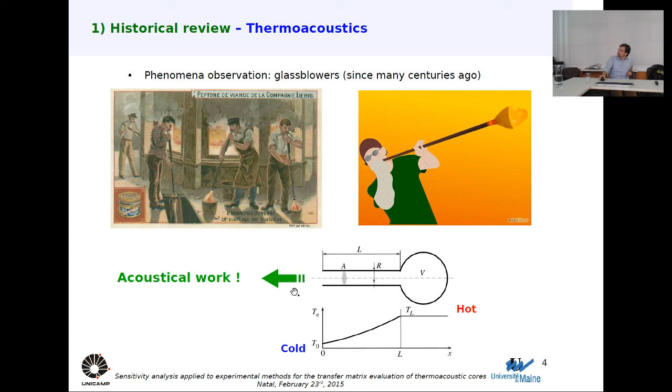But our interest is in harvesting thermal energy. Therefore, our interest is in the thermoacoustic engine. Okay. In this figure, you can see the representation of what really happens if you reproduce such a piece of glass in such conditions. It will make sound, very loud sound. And the interesting thing is, even if you have a very intense sound pressure level, the energies involved are much less than the appearances. So you have to calculate in order to achieve a good, proper design.

You can see here the temperature gradient is not zero, and this cavity, which is a bulb, works as a spring, and the air, in this case it's air, the fluid, it must be a gas. It must be a gas because the phenomena involve variations of density, and liquid almost doesn't have variation in density.

Although you can conceive a thermoacoustic device working with liquid. And I even saw a modeling for a thermoacoustic device working with solid. So even for solids, you can transmit energy by means of acoustic waves through solid media. Do your scales get larger?

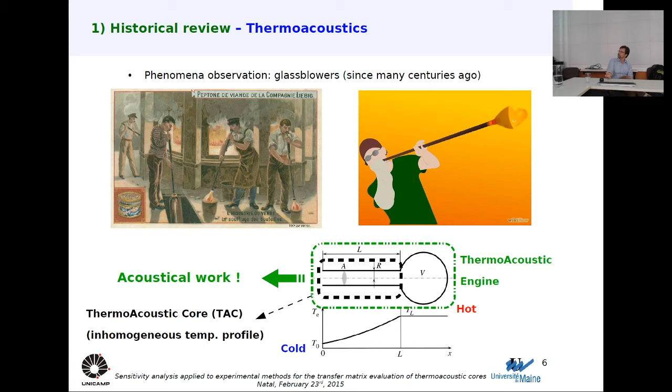And inside each one of these pores of this porous material, you have the phenomena that I just described before in this figure of this tube. So this waveguide is the equivalent of a single pore of this porous material. Okay? As a result of this conversion of thermal energy into mechanical energy, you have the acoustic field.

What is acoustic field? Acoustic field is a simple way to describe that you have acoustic pressure and acoustic velocity. What is acoustic pressure? Acoustic pressure is an increment of pressure because of the acoustic field. So, for example, we are under atmospheric pressure, here in Campinas a little less, and the average pressure is, I would say, 1 bar. That means 10 power 5 Pascal.

Okay? What would be an acoustic pressure in this unit, Pascal? A high acoustic pressure would be 1 Pascal. Therefore, 100,000 times smaller than our environmental pressure. So this is the increment of pressure that you add, and in the other instant of the acoustic cycle, you take away. So the oscillation, just as an example, 100 Pascal is a high acoustic pressure increase, or one?

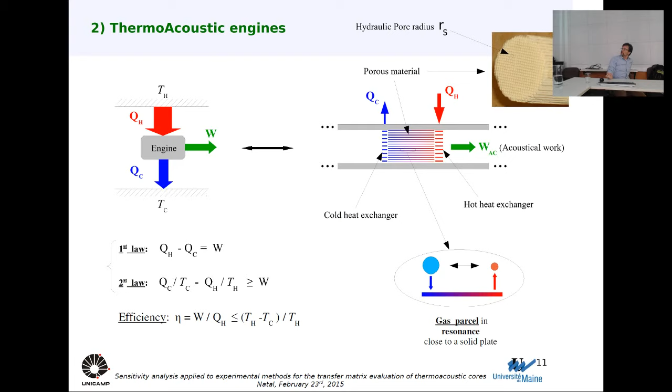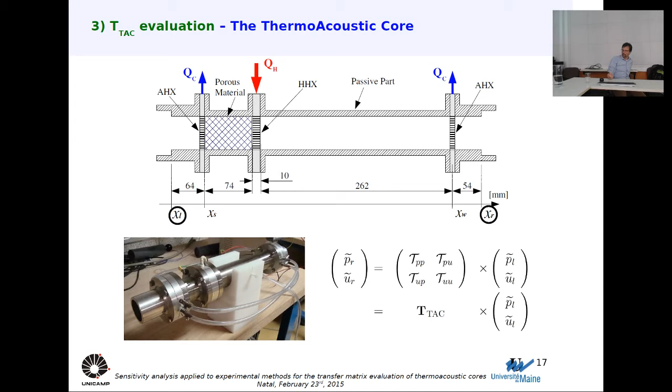And the interest in keeping this device closed in a very controlled chamber is the possibility of having different gases besides air, and also having higher levels of pressure. For example, 30 atmospheres average pressure, not acoustic pressure. And besides, you can have acoustic pressures at much higher levels than the example I told you a few minutes ago. So this is an initial idea. Of course, there are many things we want to pay attention to, and we are going to place this discussion in the interest of energy regeneration. But anyway, this initial idea precedes the following discussions.

Okay, did you understand? I think I could explain reasonably. How do you harvest power from it? Do you have an electromagnet on the end? Yes, just a loudspeaker working in the opposite way. How does a loudspeaker work? You introduce electricity, and it moves. Because of this movement, you generate an acoustic field. However, if it's not turned on, then the acoustic field reaches this membrane and makes it move. When it moves, because of the coils, it generates electricity.

If you pick up a loudspeaker and move it with your finger, you are generating electricity, because it is the opposite way. How much power are we talking for a system like this? What's the potential? It varies a lot. For example, 100 watts, or a bigger system, 30 kilowatts. Okay. And the 100 watt system, what kind of footprint? How big is the unit itself?

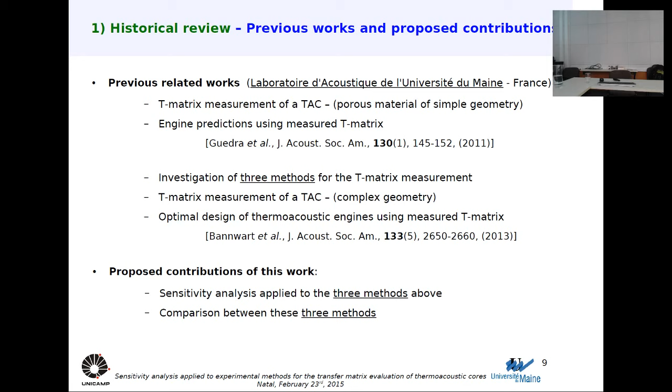Listen, when you say the 1 kilowatt system, is this 1 kilowatt power output, or is it 1 kilowatt of heat transfer from end to end? 1 kilowatt of acoustic power. Acoustic power. Yeah. Okay.